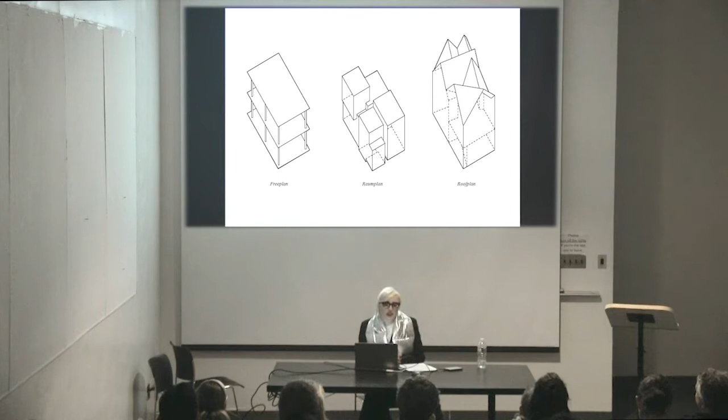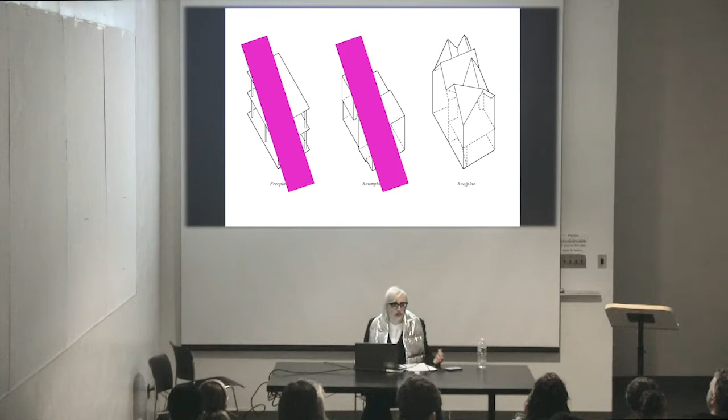It is a conceptual project around 87 cross-laminated timber panels, 3 representational models, which I'm going to explain tonight, 1,700 square feet of glitter stucco, 10 faux finishes, and a proposal for what I'm calling a roof plan ideology, which is a suggestion of how the discipline might shift into a new spatial paradigm, potentially rejecting the free plan and the Raumplan of the past.

As Michael mentioned, MALL is the name of the practice. It stands for Mass Architectural Loop-de-Loops. The acronym, of course, is a 20th century Americanism, which is in wide circulation. Americans love their shorthand. And this is what MAL looks like sitting in a sea of known acronyms outside of our discipline, ranging from governmental agencies and digital technology to best social media practices, OMG.

And this is MAL sitting in front of, in a sea of architectural practices that also use acronyms. So Foster and Partners, or David Chipperfield Architects, who are my former employers.

So MAL uses short form as a way of allowing the long form name to change from month to month, or as our architectural interests start to shift for each project. MAL is interested in an intellectual project, not a formal project, which is why a lot of our architecture tends to look differently from project to project. There's no kind of formulaic formal driver.

MAL can also mean miniature angles and little lines, or maximum arches with limited liability, and we can always add the C when we're wanting to feel a little more professional.

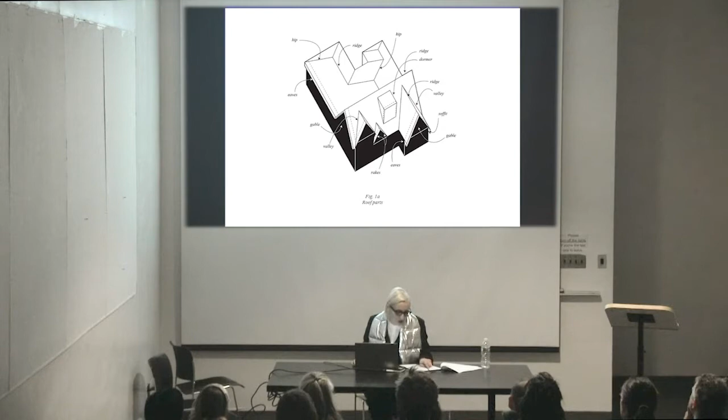So I'm terming these ordinaries the contractor's stockpile. In this case, all things pertaining to the roof. And the lingo goes like this: eaves, ridges, valleys, rakes, soffits, gables, hips, and dormers.

Maybe one of the literary references might be Hawthorne's House of Seven Gables, but the hashtag is domestic hats. And if we consider the contractor as a geometrist for a moment, then it's possible to think of these piles of 2x6s and wood frame construction as the project of planar inclination. And maybe this is kind of the American version of the contemporary cathedral.

In the contractor stockpile, there's endless variations of the domestic roof pitch with slopes like 3 to 12, 7 to 12, and 9 to 12. This is a really straightforward, basic catalog of roof types: shed, dormer, gable, mansard, butterfly. And they're so commonplace that we kind of overlook their spatial possibility when we think about what they can do for the interior.

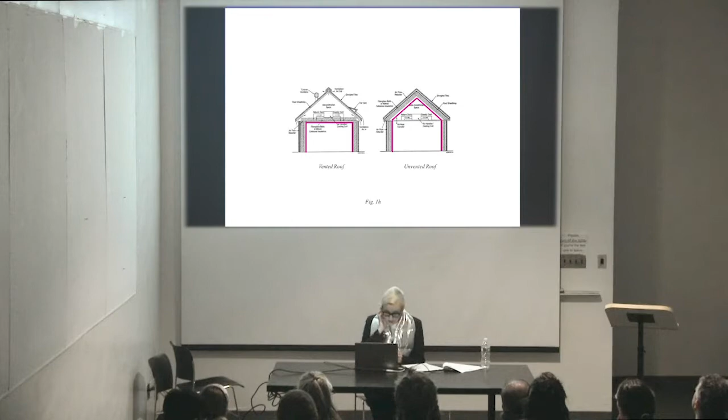Current modes of construction from the contractor camp promote building vented roofs, which is on the left, yet the unvented roof allows us to have a visual connection of what's otherwise deemed attic geometry.

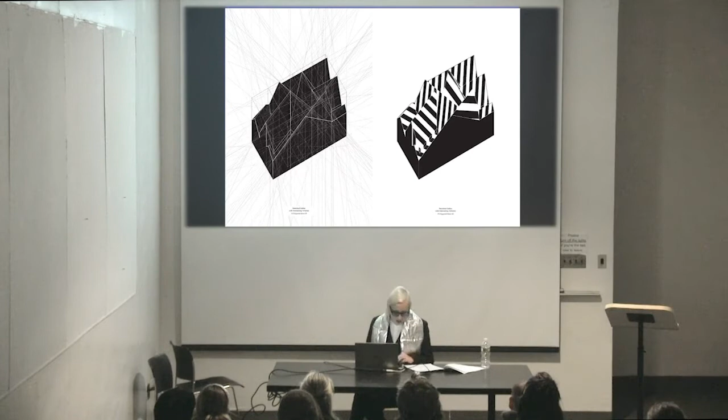So trying to rethink the role of the massing model in architectural representation. As we know, massing models are usually small. They're usually the result of an iterative process by the architect. They represent the schema, the diagram, or proto-architecture. They're lacking detail and often made out of a singular material.

Massing models distinguish differences in a volumetric study. Let's make it slightly thinner, no, a little longer, or better yet, let's make it fatter.

So these models were created at kind of an awkward size. We scaled them up, but without any more detail. They didn't fit in the car we were trying to transport them in. They don't fit on a client's office room table. They're intentionally inflated — they merely represent themselves, no longer the representational stand-in for something else.

So then we took the models out of the gallery and back into the city and dropped them off in front of the original houses as kind of yard art, and worked with a photographer, Caitlin Peterson, who had a large format camera.

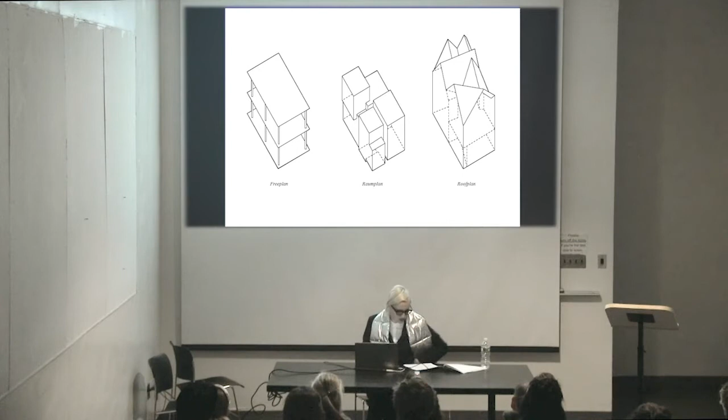Haus Gables and the dollhouse model — we're trying to work through the roof plan. It seems to me that this is an ideology that could start to reorganize space and start to drive the plan logic.

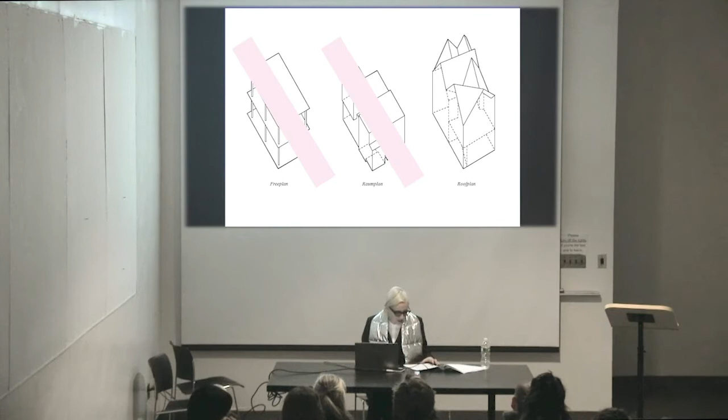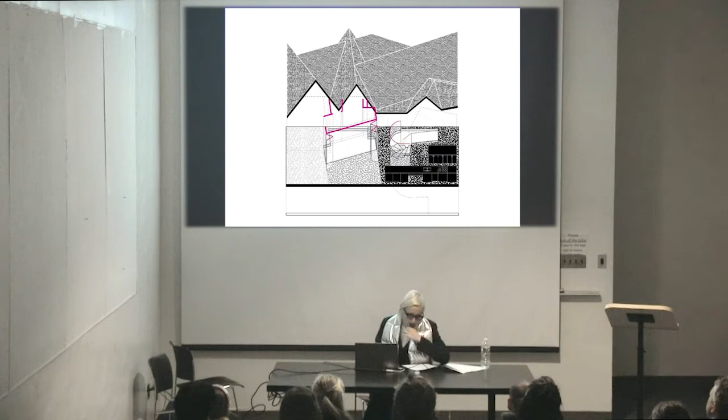The interior materials are mapped onto each room, but without an overall logic. They're only carefully determined on a kind of room-by-room basis.

Everything you see in the dollhouse is represented in Baltic birch plywood, but in reality these are large sheets of cross-laminated timber panels. We purposely didn't cut up the dollhouse into the panels of the CLT. Instead, we cut one seam and opened it up with hinges, just as a dollhouse would behave.

At the 1 to 12 scale, these materials are graphic. They represent pop, and they're not what they seem. They're almost like a series of stickers.

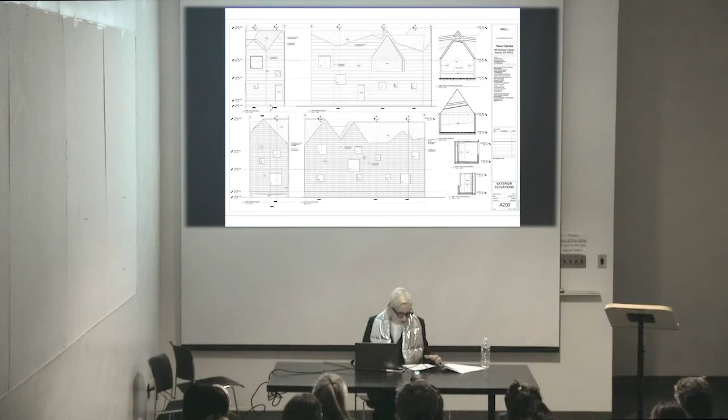These are the drawings that were sent to the city for planning permission and to get a building permit. They look straightforward, but they're trying to create a 55-foot long exterior faux finish, which I'll explain. The two references here are Mary Corse's paintings from the late 60s, the white light paintings, where she's painting with the glass beads that are in the reflective markers on roadways.

So I started working with a team to try to figure out how to make a facade with glitter in it, and these are some of the tools. We made a series of mock-ups, which are kind of hard to photograph.

Before getting this built, I tried to describe this process we had come up with in the studio of producing these fake white bricks with a dash finish of glitter stucco, and the subcontractors said, well, we've already done that—it's on an Arby's just down the road.

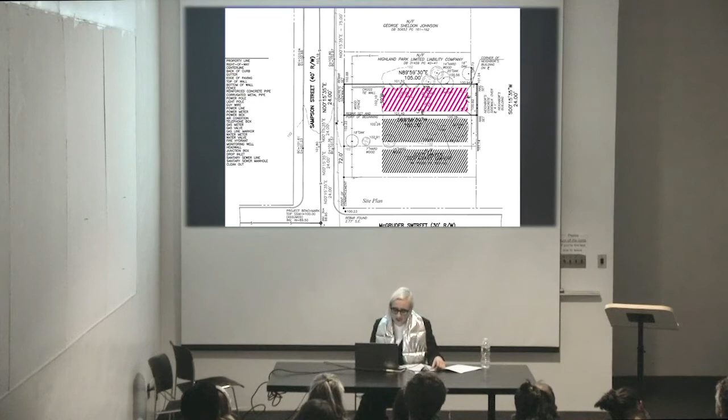The house is located in a neighborhood that adjoins this development called the Beltline, and the public access point is just at the back of the house. This is a path that connects 45 in-town neighborhoods, stitching the city together. The New York Times calls it a glorified sidewalk, but really what it's doing is getting people to walk in a city where people usually don't walk, and it's transforming the city.

What's interesting to me is the way the real construction is most definitely trying to be real and serious, but it starts to remind me of the scaled model being assembled in studio or an office. If you squint your eyes, you can see pieces that look like they're cut out of the laser cutter—like foam core or chipboard being folded up into the larger massing.

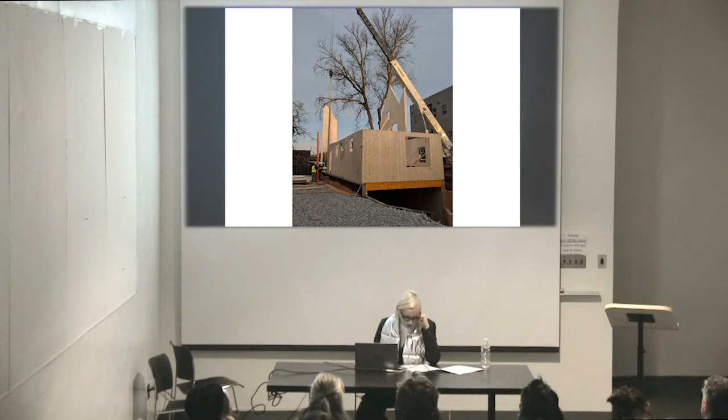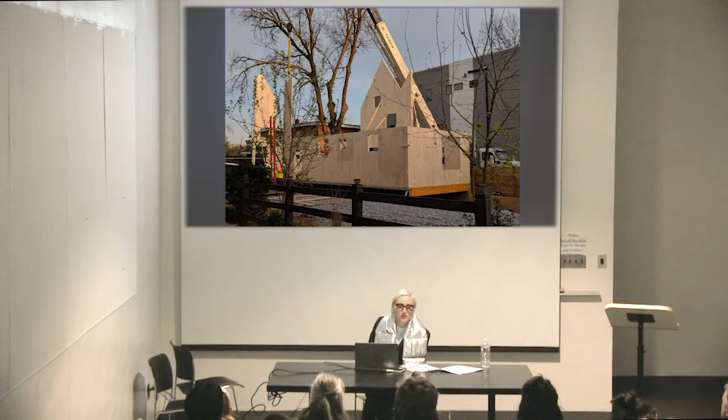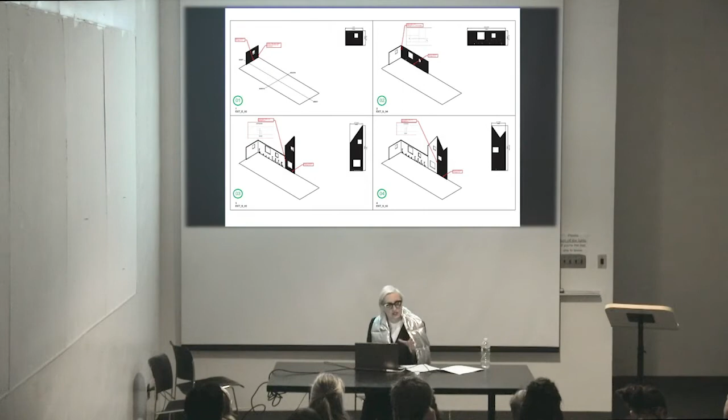So there are 4 engineers on the project: Hanif Kara of London, AKT; a group out of New Hampshire called Bensonwood; someone running the numbers called Fire Tower, who specializes in mass timber engineering; and an engineer in Atlanta who designed the concrete box that the CLT box sat on top of.

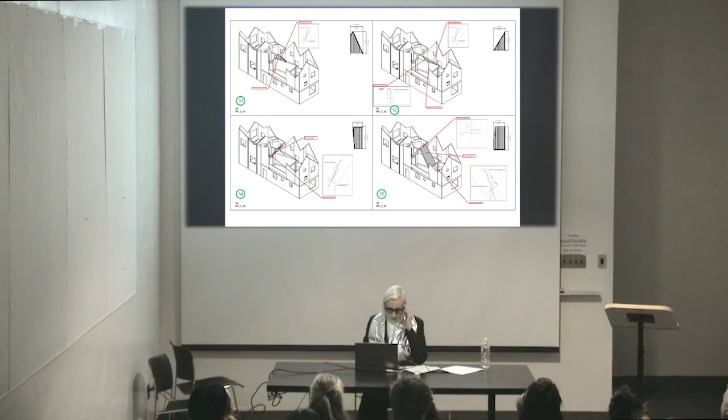These are the drawing set—87 drawings, one for each panel—that describe to the installer where the panel goes. The engineer has also marked up the name of the screw and its angle for installation. The screws are about 9 to 15 inches long, and the whole thing gets screwed together with a set of screws.

So the installer did not have a computer on site—he's just looking at these drawings and going by them. Yeah, this is like a mix of that.

The materials come from KLH in Austria—big 50-foot by 9-foot planks of CLT being milled, then loaded into a container that crosses the Atlantic Ocean and shows up at the port of Savannah. From there they're transferred onto 11 hotshot trailers, small enough—or big enough—to carry about 11 panels at a time, but small enough to fit on the site. There's a coordination process for what panels come when, related to the order of the construction sequence.

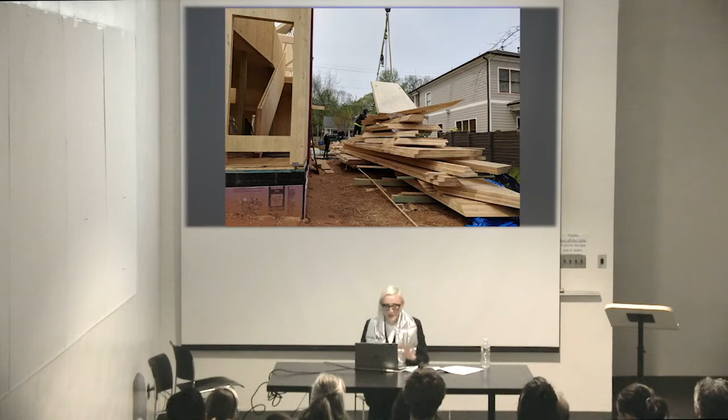I wanted to show this image because it's one of many different angles and cuts. There were just piles and piles of CLT arriving—the installer's like, 'stop the trucks, we have no more space,' and we're like, 'we can't stop the trucks.' So it was a logistics nightmare, but it all worked out somehow.

This is the crane—if you look, what's it doing? Okay, there's the installer, Terry Ducat. This is the second CLT house built in the U.S.; the first one was in Seattle, and the architect is named Susan Jones.

When working on this project, she said I should try to convince her super to come to Atlanta and put the second house together. This is kind of the most heroic moment—that's one of the biggest pieces. The materials are 3-ply CLT for the exterior and interior walls, 5-ply for the roof panels, and 7-ply for the floor panels.

And this is all finished product, right? So anytime there's a transfer from the shipping container to the hotshot trailer to the exact installation, whatever happens to the panel is the final interior finish. And so it's painted up now, and that's the Atlanta skyline, notably all of John Portman's towers, which have all the super atriums.

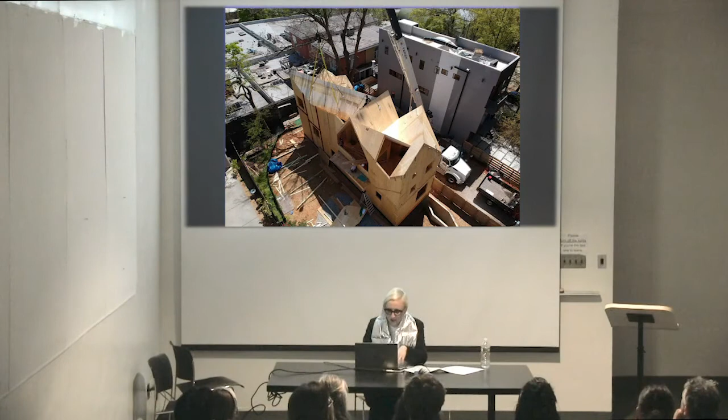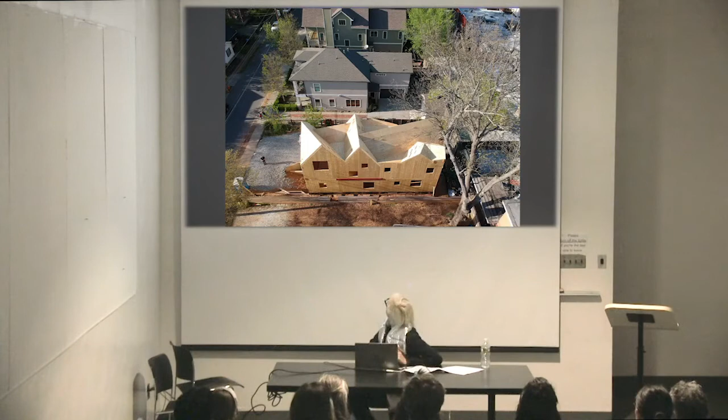This image is interesting. You can't see mine now. This image is interesting because the second gable there, if you look straight up, is kind of in direct line with the neighbor's gable. And I think things like this happen when working on the ordinary. There's going to be coincidences like this.

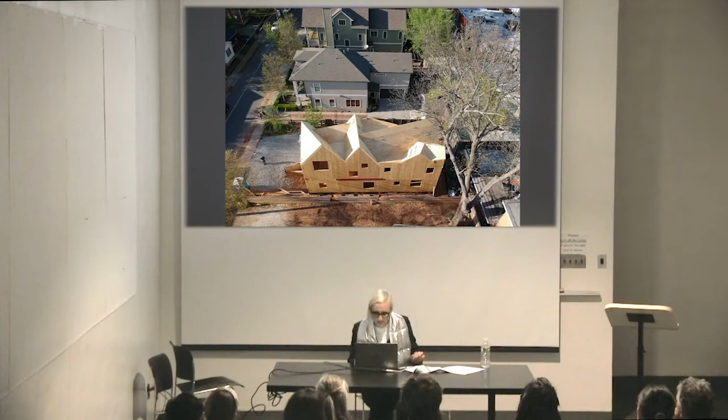So I would say this is the one-to-one model, this one image. Right after it was shot, I asked a photographer to come in and shoot the CLT in its raw state. We had about 4 hours of light before the contractor needed to start weatherproofing and putting in the windows. And so you can see all the brackets on the floor. Those are other hardware and connections that all get covered up by the faux finishes that you saw in the final shots.

Architectural photography is really important to me. This is, all photography, I guess, is important. This is me standing on a roof with the photographer Timothy Hursley out of Little Rock, Arkansas, where he's lit the whole exterior of the house right at dusk and got these kind of dramatic images.

Maybe it's more like Southern Gothic here, or maybe it's dirty South architecture, I don't know. And so this one kind of says the whole story to me, because it looks, in my eyes, like one of the domestic cats, built one-to-one, and sitting kind of strangely in the neighborhood context. Yeah, and John Portman.

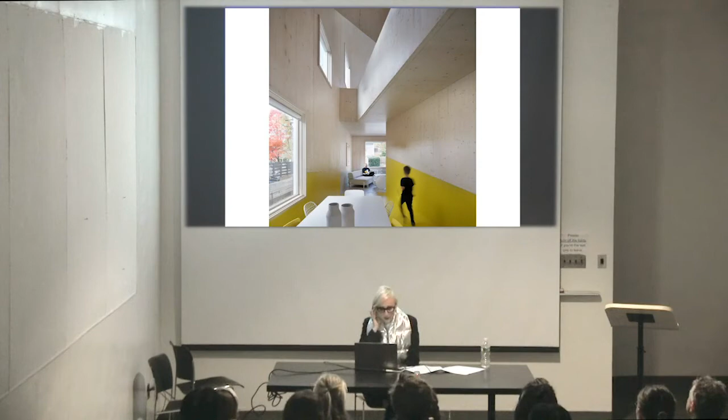This is a photographer from London called Naro, and she really captured maybe potentially the dollhouse thinking into the kind of scale figures and arrangement of furniture within the interior.

And so there's two spaces that are really white in the house, and one is this kind of patio space on the second floor. Obviously the house is white, but also this garage, which is not really a garage. I kind of think of it as a gallery. So it's super white and glossy and has some Dan Flavin light fixtures from Home Depot for about $22.

Yeah, I'll just leave you with these last two images of Haus Gables, and this is the point on the exterior where the gable makes a strong profile on the north side. Thank you so much.

Questions sound good? Sure.

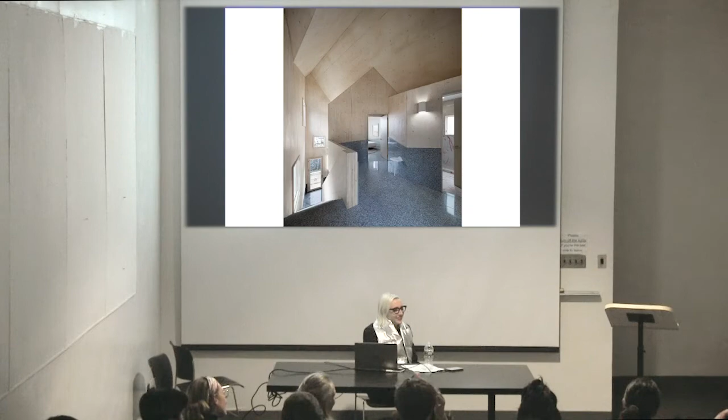Yeah, does that bother you? Why? What do you do that's interesting? I feel like there's not. Let me just let me play this out. Isn't it interesting to you that the balloon framing or the stud platform framing gains its veracity as a result of the plywood giving you the sheathing? Shear? Yeah, right, and so here you have a great surface. You love surface, right? Am I right? Yeah, I guess. You so love surface. Graphically.

Oh, you don't want it to do structural work. That's the problem. Are you willing to rotate your 4x8s because they will still perform for you? Would you do that? Yeah, but then you have to come up with a pattern. Exactly, and that's like somebody else has given me the pattern of how to cut this up—like I didn't design it. Well, I mean, I was involved.

All right, so let me ask you a different question. Then you're a great person to critique, absorb, or analyze the predicaments that Frank Gehry has sort of addressed over the years. When he has a kind of figurative project, how the surface of metal comes to confrontation with it, or when he's perfected the relationship between metal and figure, then the windows either cut in or pop out. You know, do you not find that as an extension and interest to your project in any form?

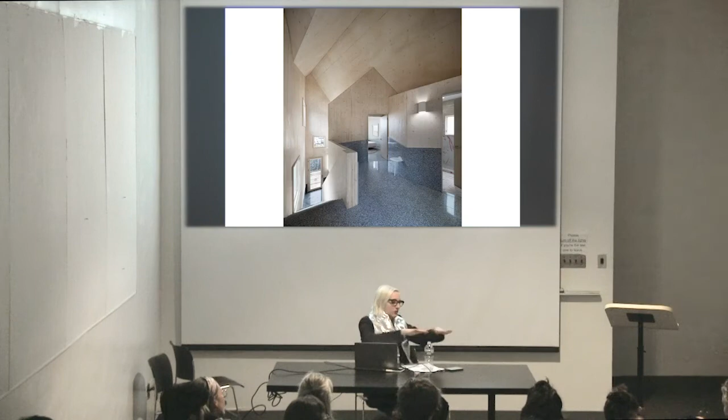Yes, definitely, but I shouldn't have a conversation with those people. I should have a conversation with you, because you and Monica started on the 4x8 on the CNC table, trying to cut sheets and figure out how to make the sheet disappear in the application of the built work. And isn't this exciting to you that now the CNC machine isn't 4x8, but now it's like 50 feet long and 9 feet? And this is your thing—I am 3,000% convinced by the CLT thing.

Yeah, but she does CLT too, and she does it in a different way. Okay, what I'm simply probing is that if the three of us do CLT, how do we do them differently? And what theoretical or intellectual priorities do we bring to them that makes those three structures different? And I'm trying to figure out, given your fascination with surface...

Who's your audience? Not this audience, I'm saying who are your historical audiences that you are cultivating in response to, in dialogue with. Not the single surface people. Clearly not those guys and gals. That's why I pushed you towards Rome. I'm willing to push you anywhere. No, this is very helpful to think about it. I'll take on the surface, but I've got to work on it.

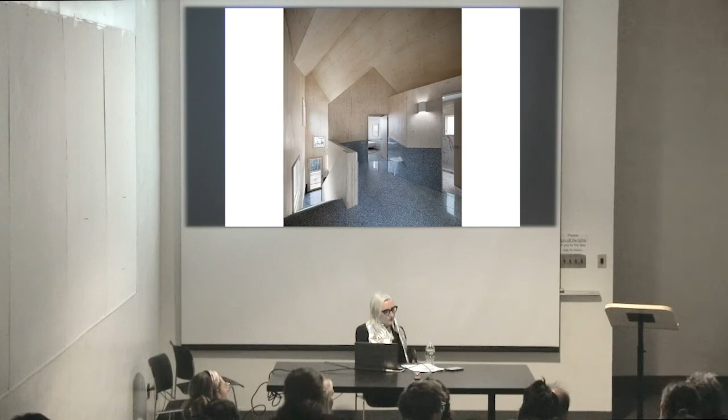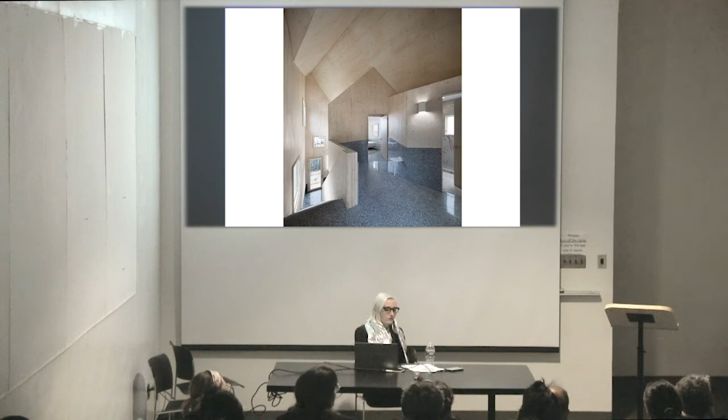And of course, because of the way in which the terrazzo operates, it subverts our horizon line, because it refuses the constancy of that. So maybe I'm not trying to eliminate something on the outside, but I'm trying to eliminate the constancy of the brick as a reference point, and instead work with these other devices you have which distort perception without having to lean as a crutch on the very traditional materiality that you so dislike.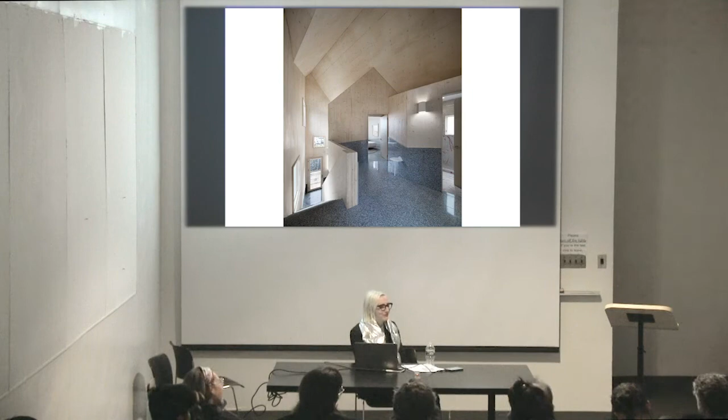That would probably be a little disappointing to you, so I didn't show it tonight. Can we start this conversation by not presuming each other's position? No, let's just ask - I like expansion joints. I do. But I want you to like them too, because you may gain it every 4 and 8 feet, or you may gain it every 35 feet.

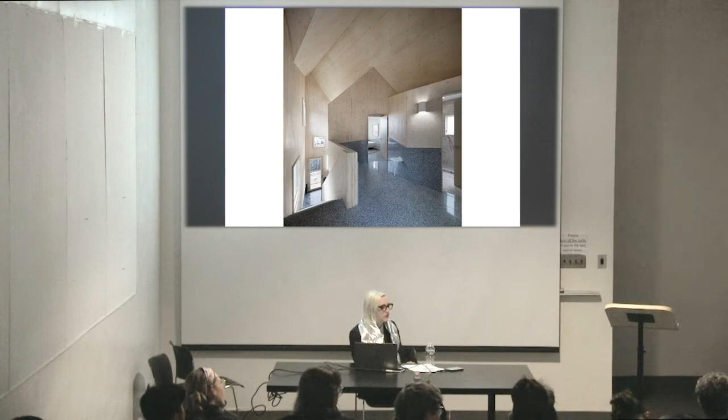I'm saying eventually it's there, it's gonna be there. The question is how do you sort of internalize it into your thinking, which you so eloquently do in other terms anyway. But I'm just trying to figure out ultimately whether the brick...

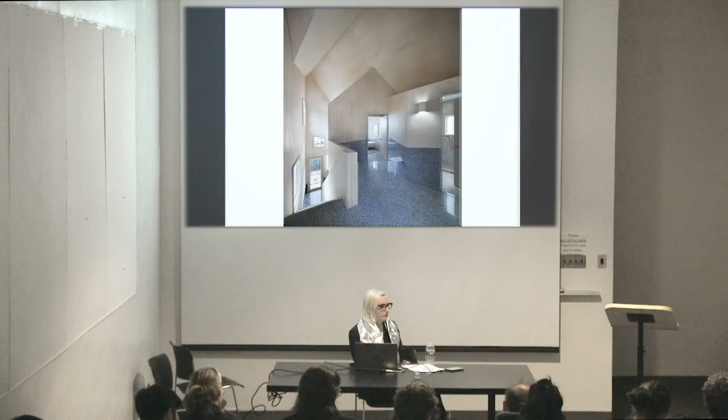It seems like, I mean, if the brick operation is so important to the exterior, it could have been an operation you could have played also on the interior through other means. I mean, but I resist that to some degree - it's just like, it's really, when you see the two corners meet...

It's like 1/16 of an inch, and they're just dying out at the corner, so it feels like a graphic instead of a material. So I guess that's what I would stake the claim on.

Have you photographed the dollhouse model in front of this, or in it? That's a good idea. You can zoom in from the model to the model. Yeah, that would be good. There's a drone shot. An interior drone.

One more question, one last maybe, because I wanted to ask them, but since Professor Young brought up the question of ordinary, would you prefer to make a distinction between ordinary architecture and extraordinary architecture, than architecture and buildings? Because some architects have the conception that some constructions and buildings are not architecture. By assuming that it is architecture, you place value into it, and then you can improve. So does this syntax ever matter to you in this whole discourse?